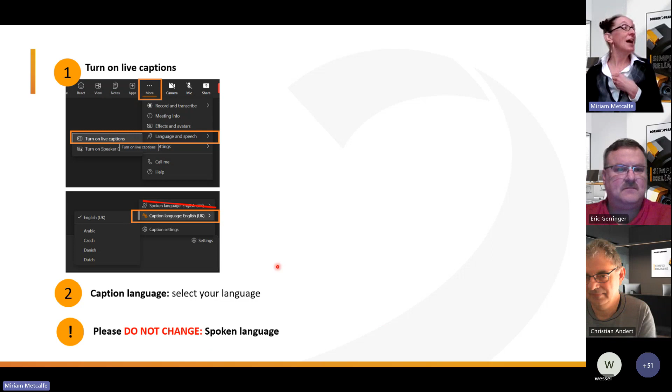Without further ado, let me welcome you once again to Milling Matters. This is the third of 3 webinars, and this one is about face milling that will impact your productivity and profitability.

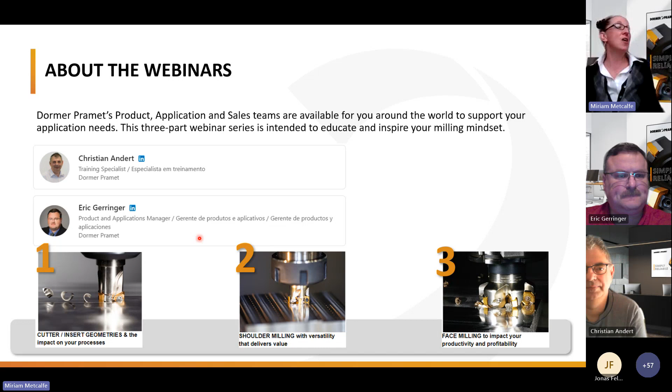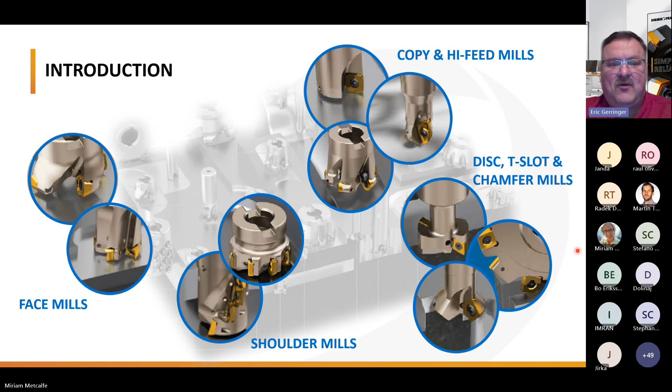Hello, everyone. So we wanted to start off with a familiar slide. For those of you that have joined us, this is the third week in a row. So today we wanted to highlight face milling, and we'll go ahead and get right into it.

Let's highlight some of the differences. When you think about the different types of face milling applications, this gets pretty broad because we all do different types of face milling. It could be cubing, it could be a plain block of steel, or it could be heavy machining where you're milling forgings or something along those lines.

When you think about the different types of applications for face milling, we could be talking about high feed machining—maybe flat components where you want to remove material quickly—or heavy duty operations such as forgings, or milling machine components such as ways. Then there are button cutters for really tough, nasty applications, where you want that round insert for extra support.

And then you get into more of the typical face mill applications that are truly just cutters dedicated to face mills. When you talk about like a 45-degree lead cutter, maybe it's a 43 or a 57-degree, those are cutters you will see typically in a positive type insert geometry, and also in negative type geometry. You have double-sided when you get more into the economy.

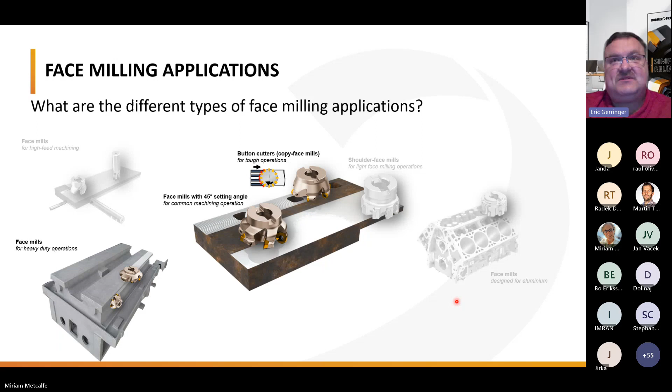So let's talk about the different types of face mills. When it comes to face milling, as I already touched on, there is almost an unlimited concept of cutters, especially when it comes to indexables, that can be used for face milling. One of the things we really wanted to highlight is the variety of cutters. Even a square shoulder cutter can be used for face milling. You'll see the different types of cutters here.

One of the things I always try to help keep in the front of the mind, always remember when it comes to face milling: you've got a 90-degree, and you have no chip thinning that comes from the lead of the cutter, but you will get radial chip thinning in your tool pass. We'll talk about that later.

Keep in mind, the greater the angle - as you can see, we have a 57-degree face mill, a 45-degree face mill, and then even all the way down to an 18-degree high feed mill - the further down the line you go with those angles, the more chip thinning you're going to get. So your milling operation is going to be more productive. That's always a thing to keep in mind: that lower angle always equals more productivity. Now, the downside is you have to take into account the rigidity of the machine, the fixture, and also what you're trying to accomplish as far as surface finish and print requirements.

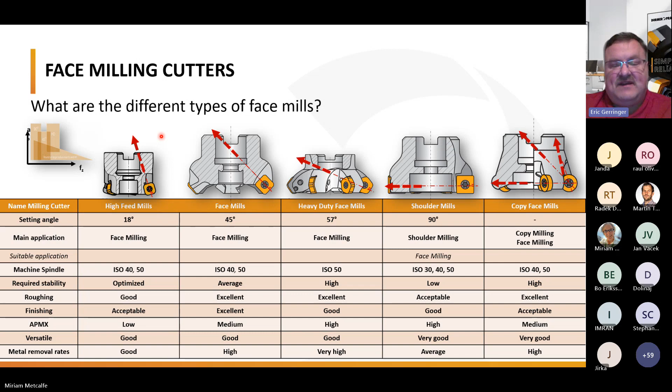So what are some of the requirements when we talk about face mills? Let's get into that next.

So we already kind of started to lean into that - how do I pick the right milling cutter? Again, I go back to some of the examples we talked about before in previous webinars. Some of the big constants that always come to mind for me are the stability of the machine, the stability of the fixturing, and what is my workpiece. Do I have a nice heavy fixture? Do I have a good solid spindle? Is it an HSK 100 machine or an SK 50? Or am I using a BT 30 machine, or maybe an HSK 40 where the machine is not as strong or not as rigid?

And then a thing we always have to remember is, what are my print requirements? What is my expectation of surface finish? What is my expectation of flatness on the part I'm machining? That will also lead you to pick the different types of cutters.

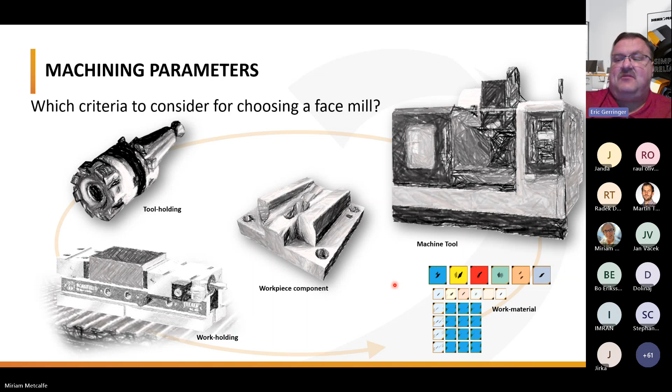And then last but not least, the workpiece material and the machinability play a huge factor in this. When you think about the material hardness, how my chip forms, those are the key things when selecting that milling cutter. So let's dive into that a little bit, and then let's talk about how the cutter pitch can make a difference and which cutter should I choose.

So when you think about the machinability of your components, my workpiece fixturing setup, my spindle setup, as we've touched on in previous webinars - when you think about a coarse pitch cutter, these are cutters that are going to have the greatest distance between inserts in that milling concept. They're also going to have larger chip gullets, as you can see from the pictures in the middle there with the coarse, medium, and fine. So when you think about materials that are long chipping or really gummy or that can bind up, these are the type of cutters that would be your first choice.

And then you think about, do I have a long overhang?

Coarse pitch cutters are also good for heavy machining, like machining forged steel, maybe a long piece of square stock. These cutters are typically what you want to use. Also think about your lower horsepower machines, where you need a large diameter cutter to cover your workpiece but don't have enough horsepower. This is a great alternative to be able to use a larger diameter cutter.

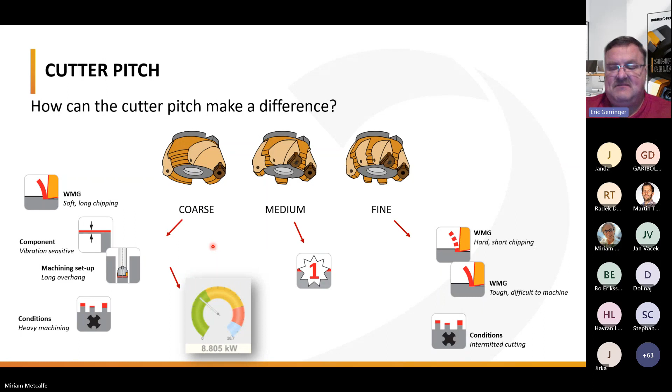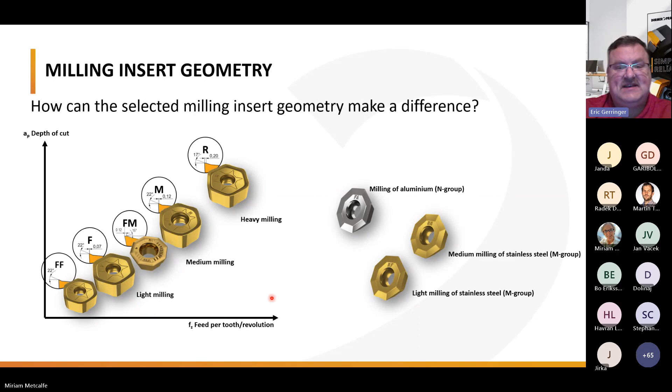Okay, and then, so how can the selected milling insert make a difference? You want to advance to the next slide for me, Miriam? Thank you. So when we talk about the milling insert grades, you almost open Pandora's box.

Once you start talking about grades and coatings, you get into the PVD coatings, which are a lighter, thinner coating, and then the CVD coatings, which are the chemical type coatings, a heavier, thicker coating. If you're looking for higher productivity, you think about CVD coatings, you're going to run higher surface footages. PVD coatings are going to be a little sharper, you're not going to get as much edge rounding, and you'll have a thinner coating, so it's not going to stand up to the heat as much as a CVD would. But the advantage of the PVD is it will help you in more unstable conditions, where a CVD sometimes has to be a little more rigid setup.

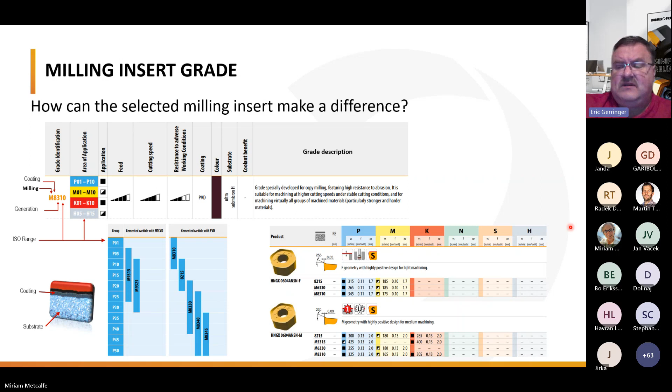And then one little tip I would like to share this morning as well is when you finish face milling, sometimes if you just pull directly off in the Z, you will get that kind of swirly finish on the end of the cut, where you're getting that flex in your spindle.

One of the tricks I've learned over the years: instead of just pulling straight up in Z, do a small ramp move off the end. This will clean up that surface if you have any deflection in your workpiece or spindle. I think that's important.

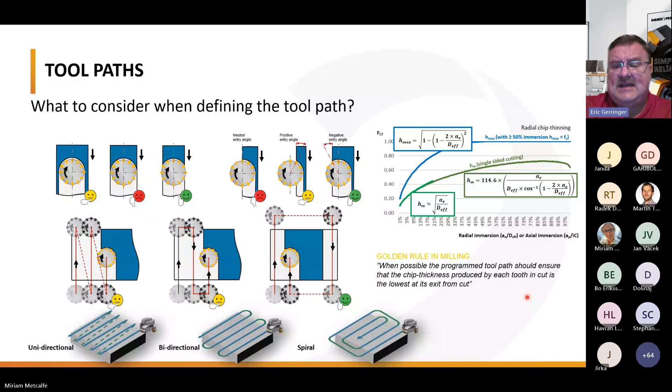One of the great things about this type of cutter is that the cutter body itself is positive, with positive rake in both axial and radial directions, so the insert leads forward a little bit. The insert is offered in several different geometries and also has some positive rake on it, so this concept will be super free cutting.

You'll have low cutting forces, and your machine will be really quiet when using these cutters. The nice thing about this concept—and we're not the only ones with this style—is that for us, we offer a round insert and also an 8-sided insert.

This gives you a couple of choices, because we all have those instances, especially with round inserts, where it doesn't get indexed properly and you lose some cutting edges. So you may see more benefit in using that 8-sided insert.

But if you're using extremely light depths of cut, like in a finishing operation, you may want to lean towards the round insert to get more indexes. You could also potentially get more chip thinning with those really light depths of cut, so please keep that in mind.